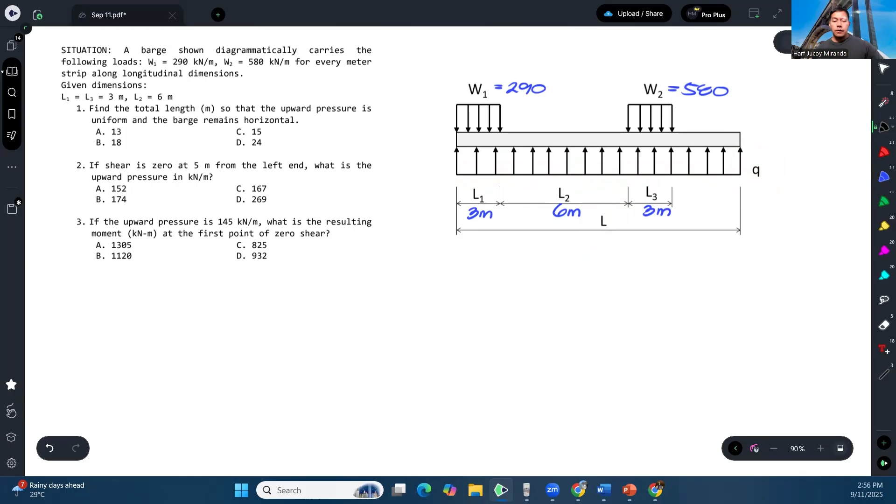Gagamitin ko to as my reference, yung left side. So we have summation of moment about the left side is equal to 0, assuming counterclockwise positive. So we have yung 290, kailangan muna natin yan.

Ikuna ng equivalent load, bali yung area nito, which is 290 times 3. Tapos yung moment arm nito, yan yun, W1 times 3. Ang moment arm niya, ito half. Half ng 3, so that's 3/2.

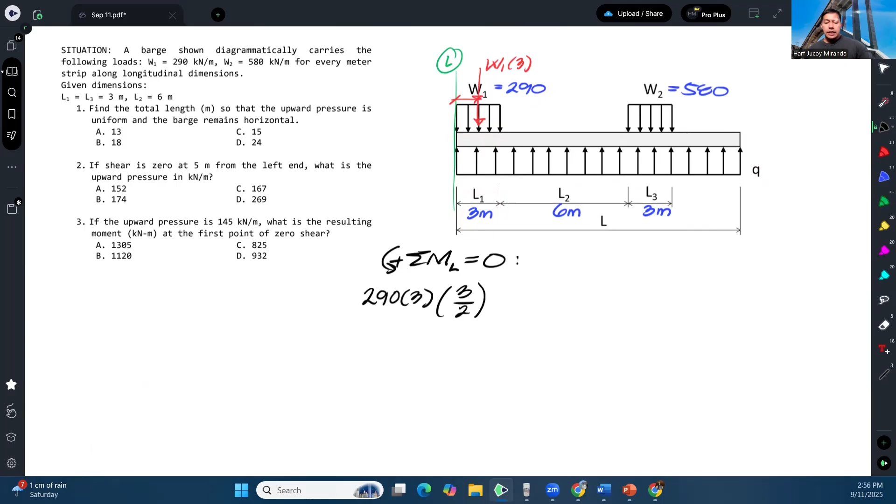Okay, and then that will rotate sa left side ng pa-clockwise, so I'll set this as negative.

Next, yung 580 naman. So 580, ganun ulit, area nito, 580 times 3. So ito yun.

Okay, and its moment arm from the left ay ito. Yan, and what is that length? So that is from left papunta dito, 3, papunta dito, 6, and then half ng 3. Okay, so that should be 3 plus 6 plus half ng 3. And the rotation is once again clockwise.

Lastly, yung vertical effect nito, no? So yung vertical effect niyan pag ganito. Okay, yung value niyan is Q times L. Again, area kasi nito yun eh, so yung height mo Q, yung length mo yung unknown natin na L. Okay, so lagay ko nandito, Q times L.

Okay, and what is the moment arm from the left? So ang moment arm naman natin, ito, which is, ano yan? Kasi rectangle siya eh, di ba? So dapat nasa gitna to, half, half ng L. So this should be times L/2, and its rotation will be counterclockwise. So I will set this as positive, and that is all equal to 0.

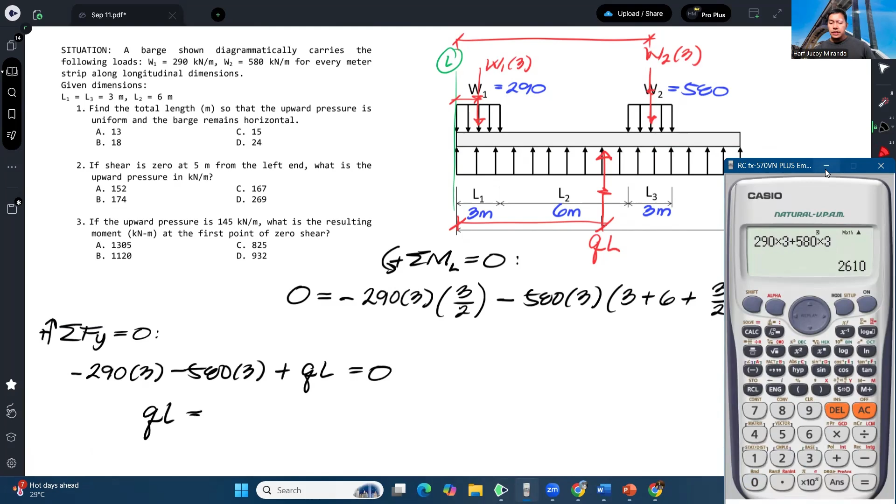Diba? And that is 290 times 3 plus 580 times 3, and that is 2610 kilonewtons. Okay, so ngayon, pwede na natin ulit palitan ito nito.

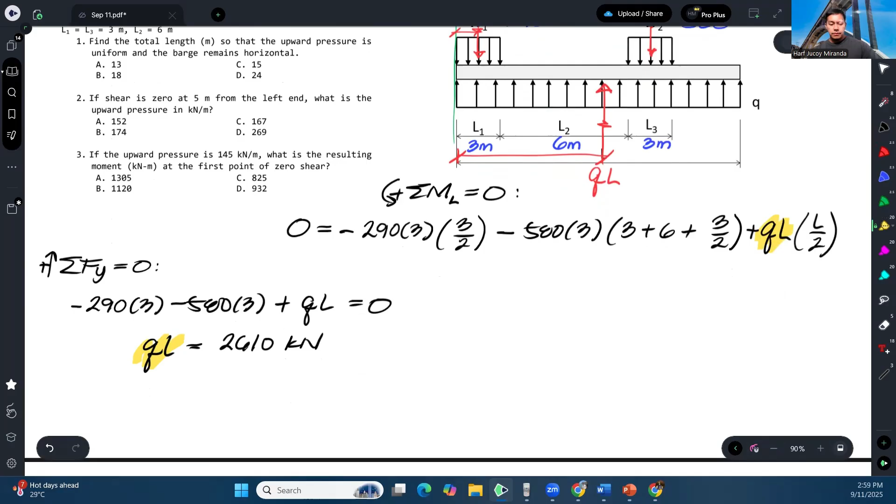Okay, and from there, we should be able to solve for L. So magiging ganito equation.

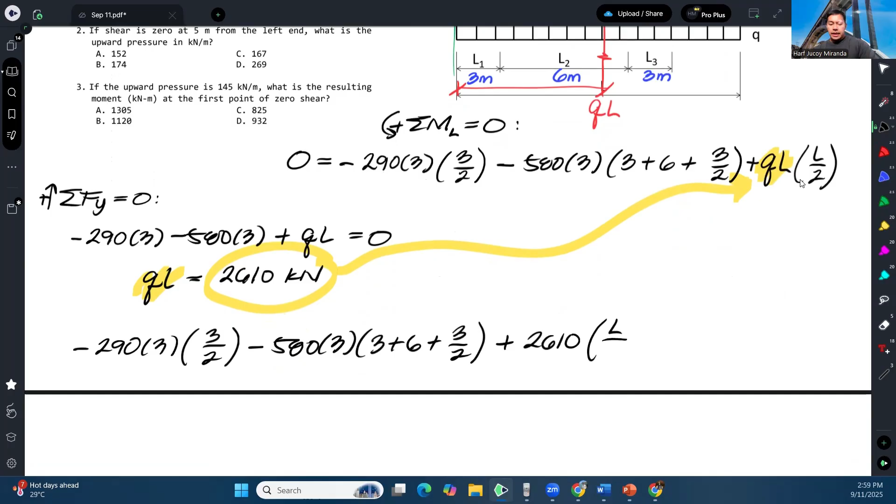Negative 290 times 3 times 3/2, minus 580 times 3 times 3 plus 6 plus 3 over 2, plus 2610 times L over 2 equals 0. And from here, we can solve for L.

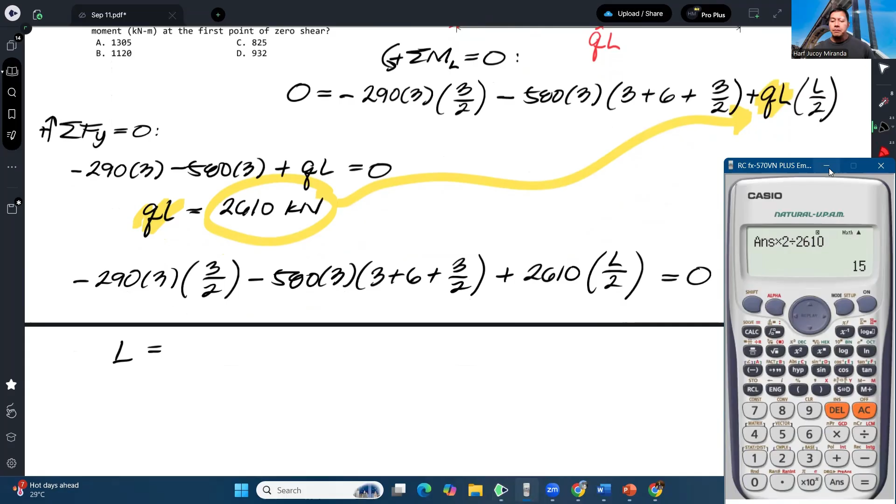Okay, so L, it will be 15 meters. So that will be the length of the barge para uniform yung reaction. So we have letter C for number 1.

Next, if shear is 0 at 5 meter from the left end, what is the upward pressure in kilonewton per meter? So itong number 2, hindi siya related dito sa number 1 kasi ang gusto niya yung shear daw dun sa 5 meter from the left end ay mag-0. So pinapahanap yung Q for this part.

Okay, so to solve for Q, I'll show you 2 ways. So una muna.

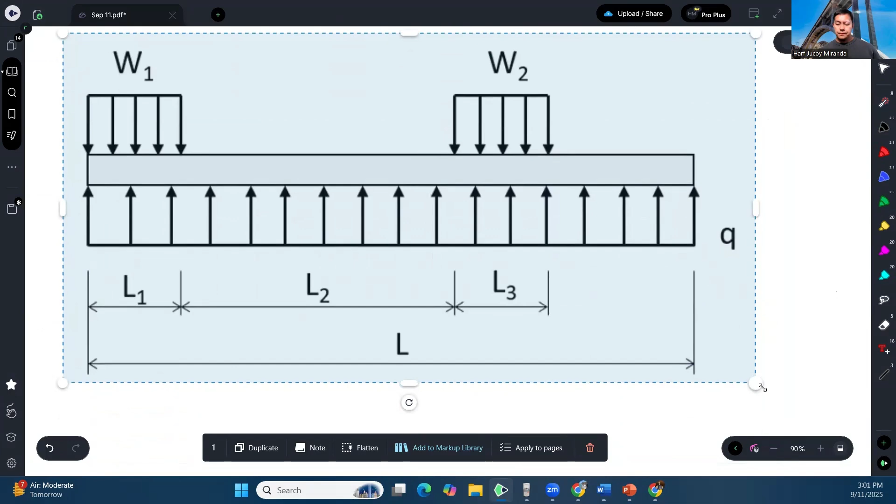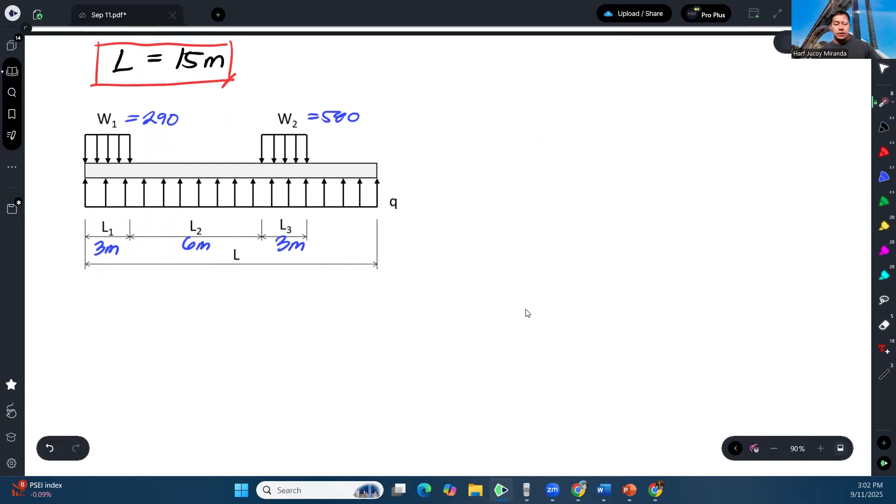Okay, so diba ito 290 to 580. Okay, so ito ay 3, 6, 3. So assuming na hindi ulit natin alam yung L. So ang tanong niya kasi, ano daw yung value ng Q para yung shear dito sa 5 meters. So yung 5 meters, no? So 3 kasi ito ay 0. So kapag dinrawin natin yung shear diagram dyan, ganito yung itsura.

So let's say ito yung 5 meters. And I don't really need to complete this, ganyan lang siya. So dapat daw yung shear dito 0. Okay, so dapat ganyan, mag-0 siya. So this is your 5 meter length.

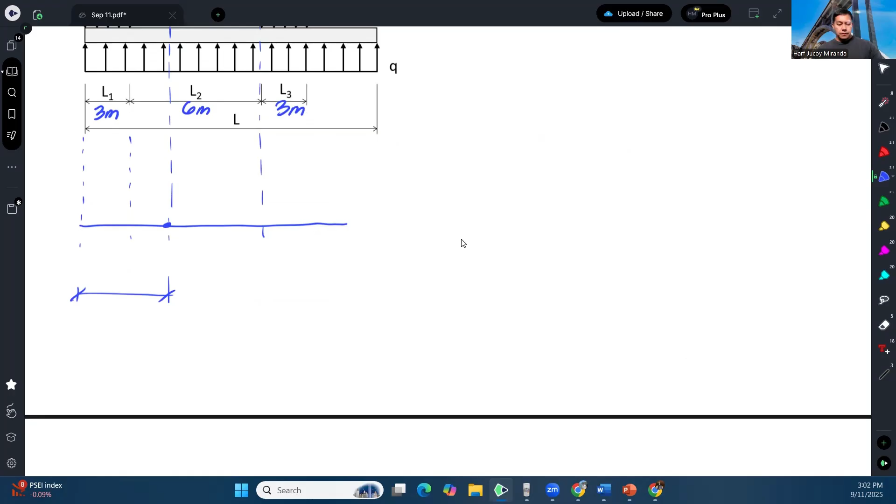Okay, so para mag-zero yon. Una, we have Q, unknown. But we know 290, di ba? So paano ba hanapin mo yung shear? Dito ang shear zero, so zero muna tayo magsi-start. Tapos paano hanapin yung shear pagdating dito? Kasi di ba ang shear ay area ng load diagram.

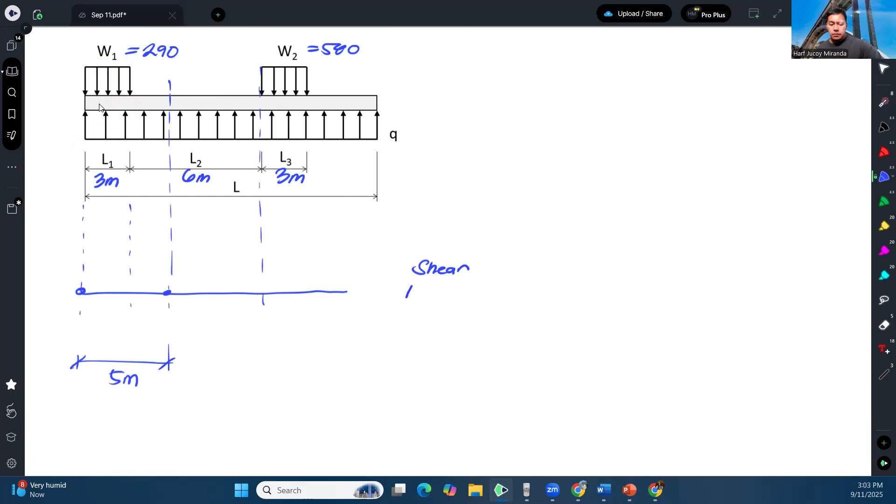So anong load diagram? Bali ito, pero magkabaliktad sila kasi as mentioned sa shear diagram, yung load, kapag upward positive, kapag downward negative. So lumalabas itong area na to, itong load na to would be negative, pababa. Ito namang load na to will be upward. Kaya parang mag-add sila, mag-plus minus sila. So ito negative, ito positive.

Pero dahil reaction lang to, it is safe to assume na mas maliit yung effect nito compared sa 290, kasi parang na-spread out lang yung uniform load eh. Ito mas concentrated sa region na to, kaya lumalabas mas malaki ito compared dito. At dahil doon, kapag ka nag-minus yung area na to sa area na to, mas mag-go-govern yung pababa, kaya negative yan, nandito yan banda.

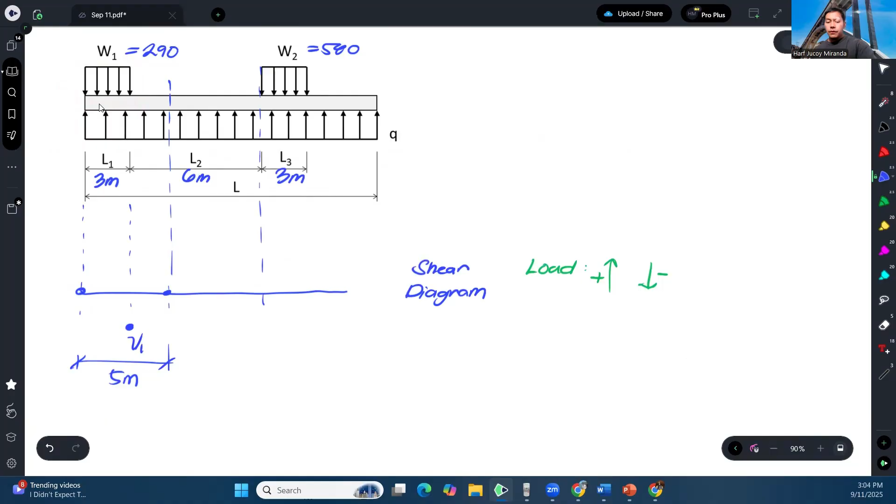So tawagin natin yon na shear 1, V1. What is the value of V1? Bali, yung area na pababa, so negative 290 times 3, and then plus yung area na pataas, plus Q times 3. So yung V1 ay equal, factor out ko lang yung 3, magiging negative 290 plus Q times 3. That is going to be our V1, and we are expecting na negative to.

And because this is just zero degrees, parehas zero degrees yan eh. Okay, so dahil zero degrees yan, dapat linear ito. Paganto.

Next, kailangan daw mag-zero dito. Yan, mag-zero yung shear. So kailangan daw mag-zero yung shear dyan. So, just to continue this, makukuha natin yung shear dun sa kabila, dito. And tawagin ko yun na V2.

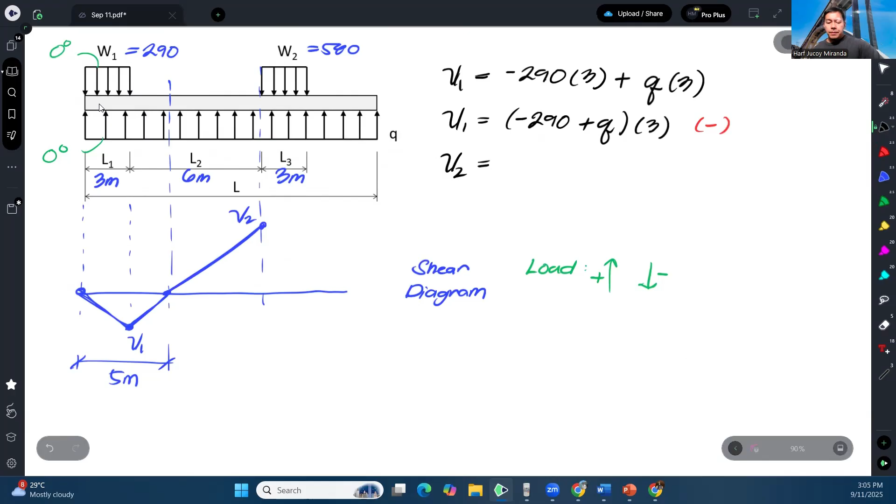So yung V2 naman na yun will be equal to negative V1, kasi yung V1 natin negative eh. Or rather, V1 na lang kasi naka-automatic naman to na negative. So V1 plus etong area na to. Kasi dito yung V1, di ba, mula dito hanggang dito. Okay, and that is just Q times 6. So V2 is equal to negative 290 plus Q times 3 plus Q times 6. And this is going to be positive.

Para ma-solve natin yung value ng Q, we can utilize, kahit hanggang dito lang tayo mag-drawing, huwag na natin ituloy, we can utilize these triangles. Itong triangle na to, dapat kasi similar sa triangle na to. At so far, alam natin na dahil 5 yan, tapos 3 to, so dapat ito, 2.

Okay, tapos ito, dapat ano to? Dahil supposedly, from here to here, 6, pero from here to here, ginawa mong 2. So yung from here to here, which is ito, is going to be 6 minus 2, or 4.

Okay, so by ratio and proportion, we have V1 over 2 meters is equal to V2 over 4 meters. Ito yun, V1 over ito, tapos V2 over ito.

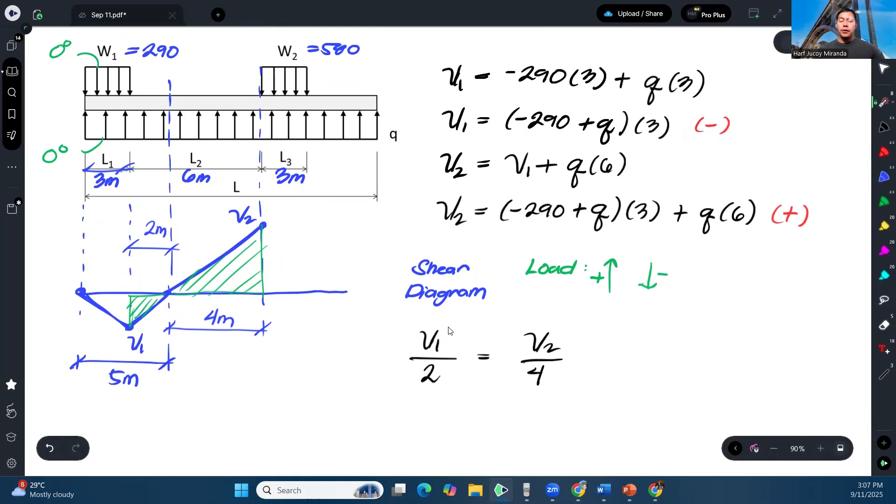Pero be careful yung V1 kasi natin dito, negative yan eh. Pero di ba pag nagre-ratio proportion tayo, nag-absolute value lang tayo, so ina-absolute value lang natin. So that's why dito, i-reverse ko yung sign, kasi alam ko na negative to eh. So i-reverse ko yung sign, that's why ini-negative ko siya.

Negative 290 plus Q. Okay, again, ang reason dito is kapag ka nag-solve kasi tayo ng ratio proportion, kailangan yung mga values dun sa shear diagram, hindi natin isasama yung negative. At again, ito kasi negative to, so para mag-positive yan, nag-multiply ako ng negative.

Over 2 equals V2, which is, ito medyo mahaba, negative 290 plus Q times 3 plus Q times 6. Ito, no need to multiply by negative kasi ito, expectedly is already positive. Okay, positive to. Lagyan ko lang ng note so that V1 becomes positive.

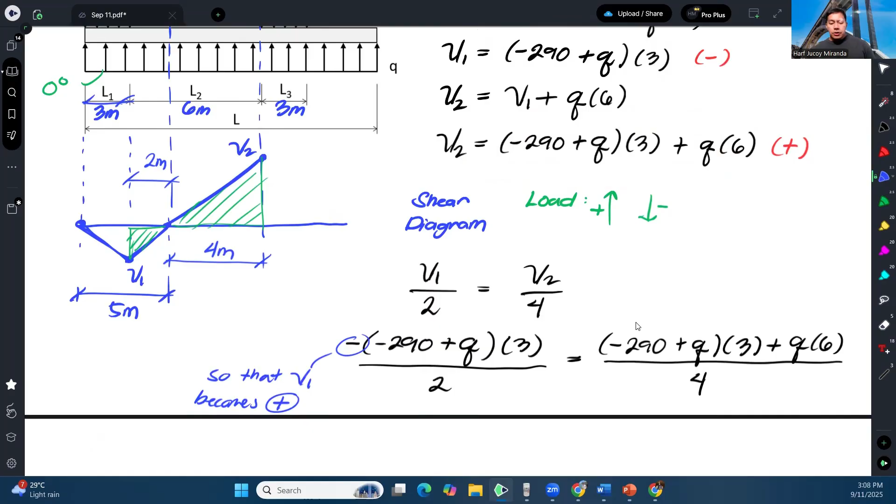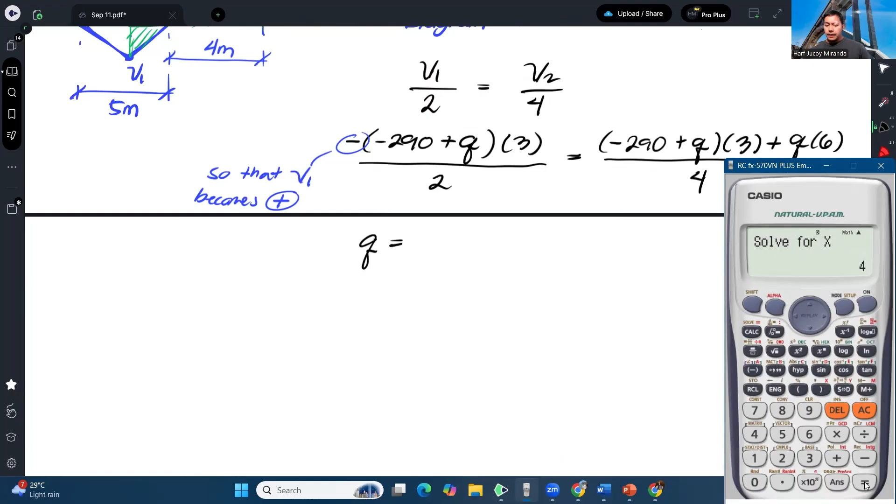And from here, we should be able to solve for Q. So we have negative of negative 290 plus Q times 3, over 2, equals negative 290 plus Q times 3 plus Q times 6, over 4. Okay, and that gives us Q equals 174, and that would be our answer.

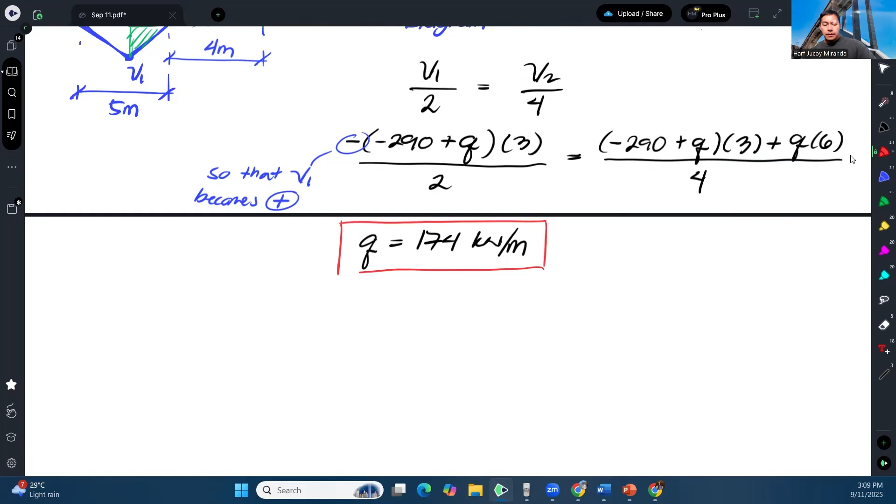Now, alternatively, kung ayaw mo ng ganyang solution na nagre-rely sa shear diagram kasi nahihirapan ka sa geometry part, pwede ka naman mag-method of section. Ibig sabihin, ika-cut ko to, i-isolate ko itong left. Tingnan natin yung mangyayari kapag ginawa ko yon.

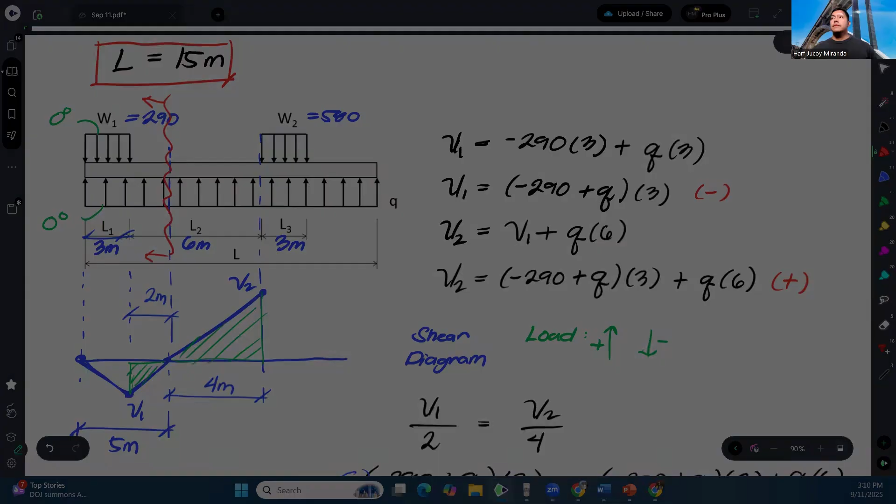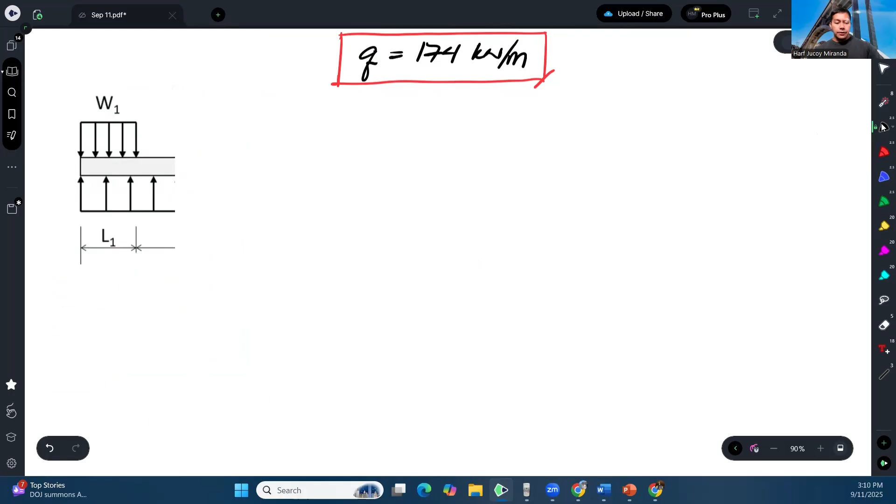Okay, tingnan natin ang alternative solution. Sabi ko sa inyo, I can show you two solutions. Alternatively, kung ayaw mo ng shear diagram, pwede ka mag-method of section. Kinat natin siya sa layong 5 meters, kasi sa 5 meters meron siyang given na value.

Sabi niya, yung shear daw dyan ay 0. So ibig sabihin, yung shear dito ay 0. Tapos may moment dyan. Okay? Tapos ito, 290. Tapos ito, Q. Okay? And then, alam natin na ito, 3 meters.

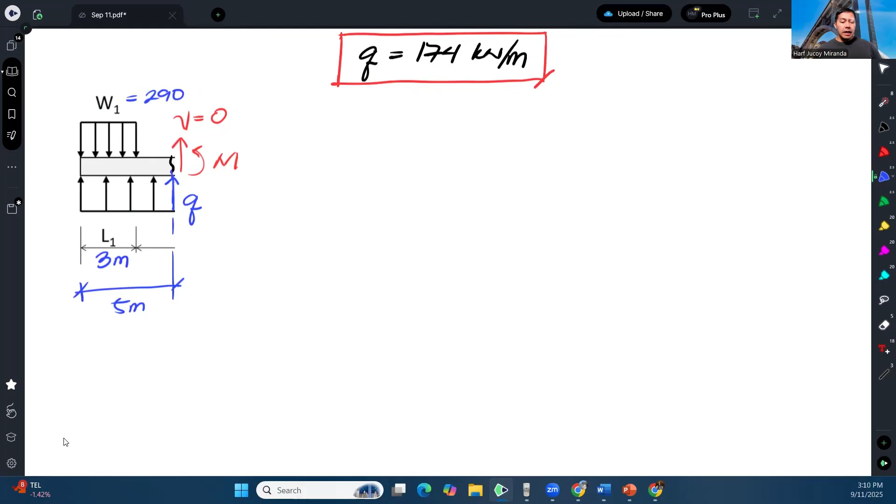Para ma-solve natin kung ano yung Q, ang mas mabilis na solution dito ay method of section. Ang gagawin na lang natin ngayon, magsasummation tayo ng forces, kasi alam naman natin ang location. So kung nag-summation tayo ng forces, dapat 0. So we have 290 times 3 na pababa.

Tapos yung Q plus upward, Q times 5 na pataas. At sa tingin ko wala nang iba, so that's it, all equal to 0. Yun na yun, kasi ang lumalabas nga, yung shear dito ay 0. Hindi naman ito pwedeng isama sa summation ng forces kasi moment yan. Okay, yan na yun. And then from there, you can solve for Q.

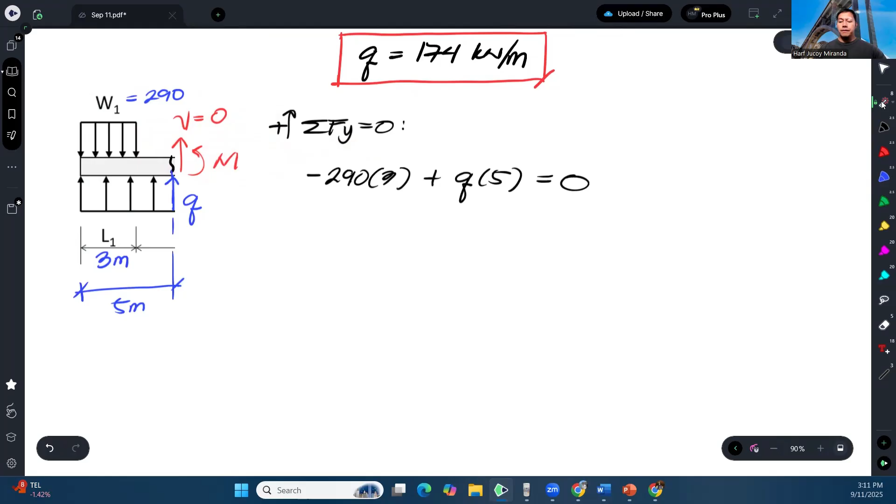And we should end up with the same answer, 174. And of course, this is easier, di ba? Kaya nga dapat versatile tayo.

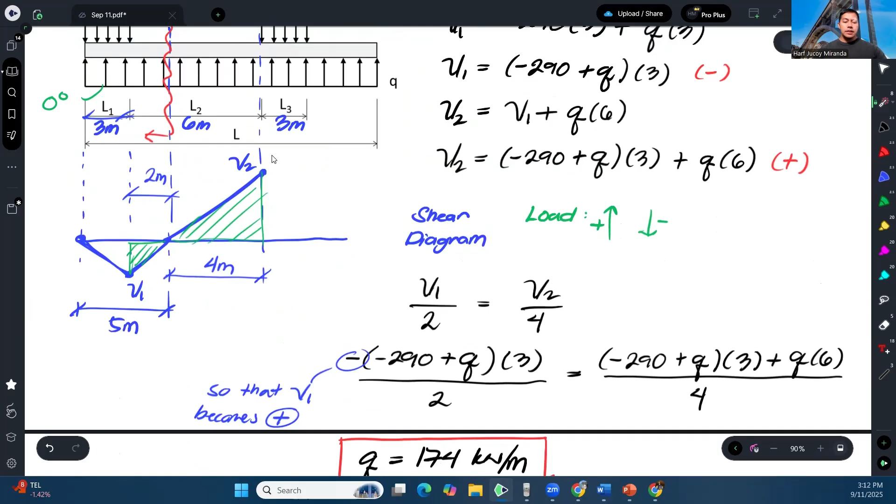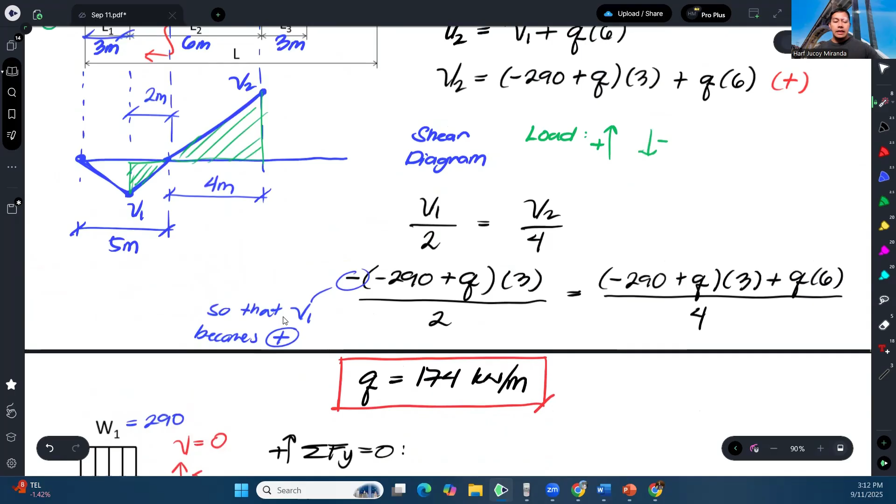Minsan kasi dumadali kapag sa diagram ka nakatingin. Minsan naman, kapag sa method of section, mas madali. Kailangan alam natin pareho, kasi minsan hindi naman lagi ito yung mas madali, minsan ito naman yung mas madali. It depends on the situation. Same lang yung sagot natin dyan. So that's how we answer number 2. Our answer here is 174.

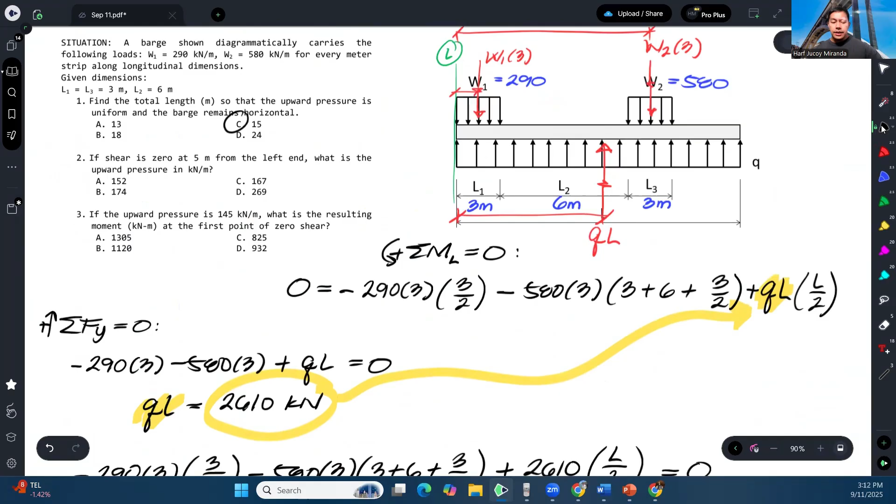Next, number 3. If the upward pressure is 145 kilonewton per meter, what is the resulting moment at the first point of zero shear? Ano naman daw yung moment doon sa first point of zero shear? Kung meron, ito naman may value na yung Q. Okay, so number 3 tayo.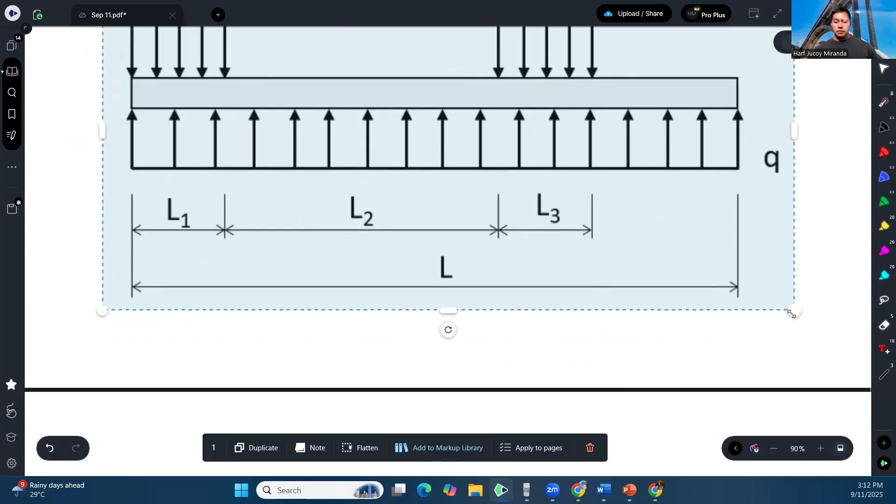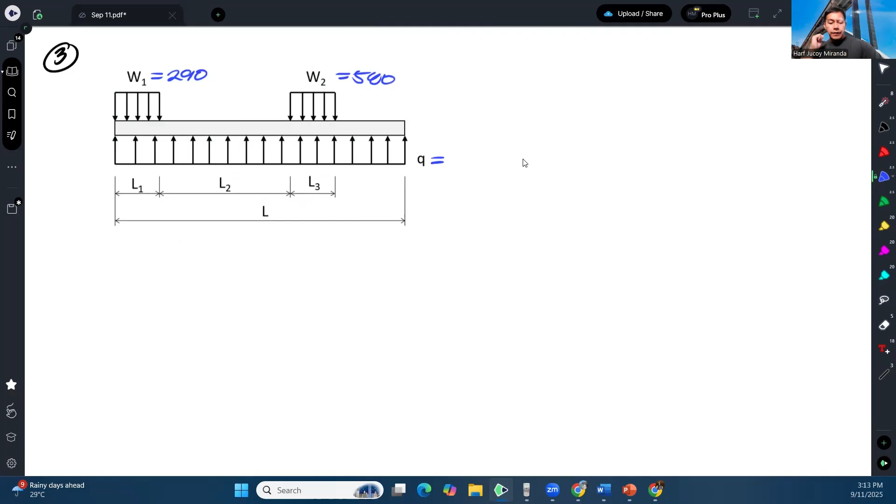So this is given 290, 580, tas given na ngayon, 145. Ang tanong sa atin, also given: 3 meters, 6 meters, 3 meters. At muli, ang tanong sa atin, ano daw dapat yung moment dun sa location na first point of zero shear. So ang una kong gagawin, pwede tayo mag-shear and moment diagram. Shear diagram muna.

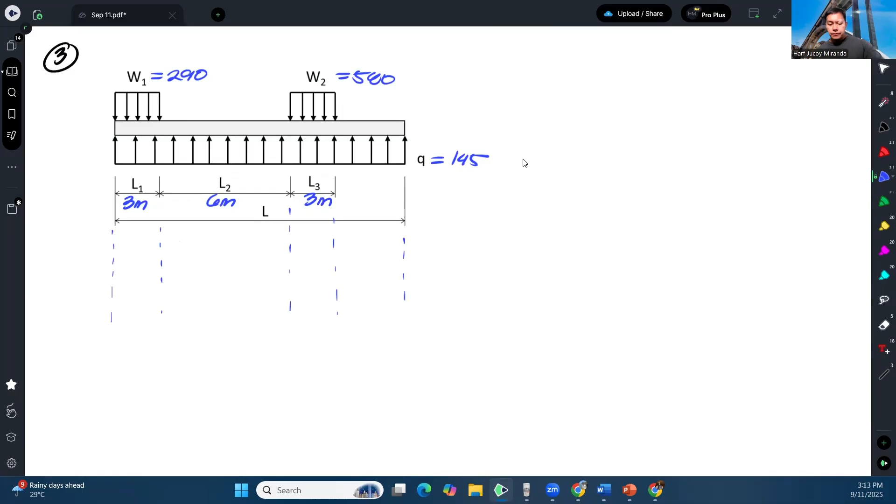Okay, so shear diagram, starting off with 0. Tapos magma-minus itong area na to, negative tong area na to, tapos positive tong area na to, para makuha natin yung shear dito. So we have negative 290 times 3 plus 145 times 3, and that gives us negative 435.

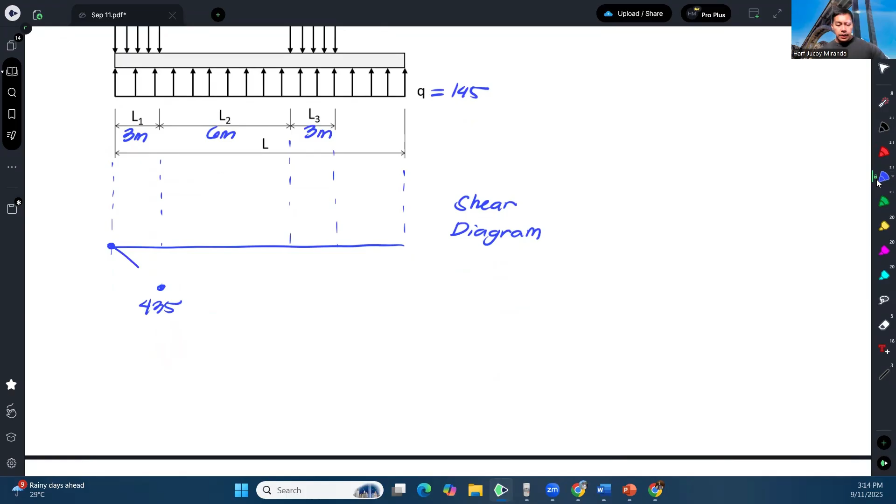So next sa baba, okay ito yung diagram natin. At pagkatapos, mag-a-add tayo nitong area na to, from here to here, yan yung area na yan, which is upward yung load, kaya positive. So plus 145 times 6, so that gives us 435 na positive. So connecting the two, ito naman yun.

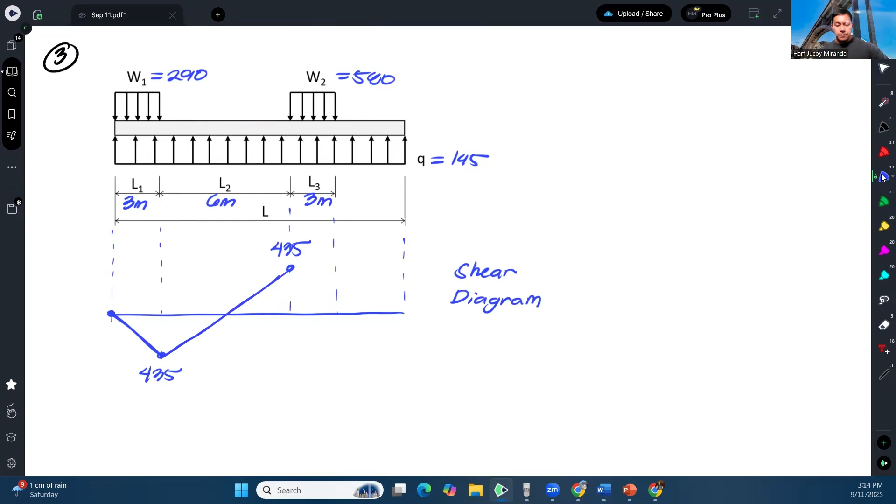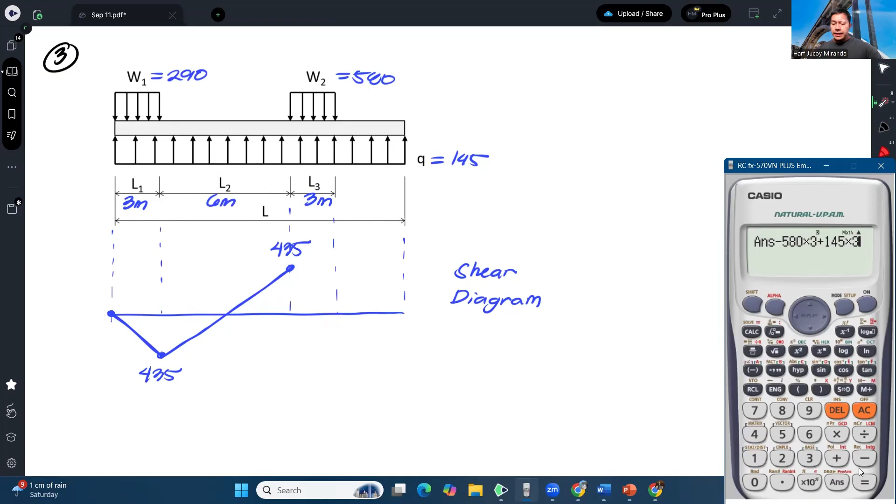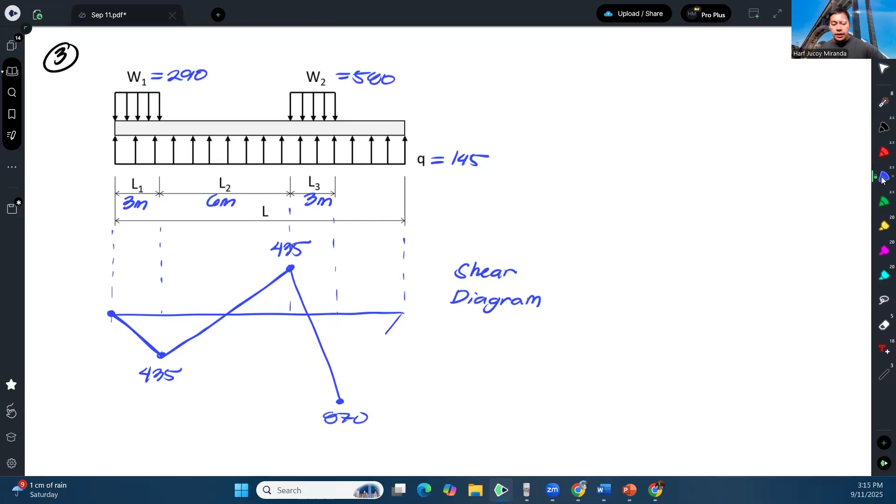Okay, kailangan na ulit natin makuha yung load dito, yung shear dito. So i-minus natin tong area na to, tapos ipa-plus natin tong area na to. So minus 580 times 3 plus 145 times 3, so that is negative 870. At saka i-connect ko na lang to kasi dapat mag-zero yan, di ba?

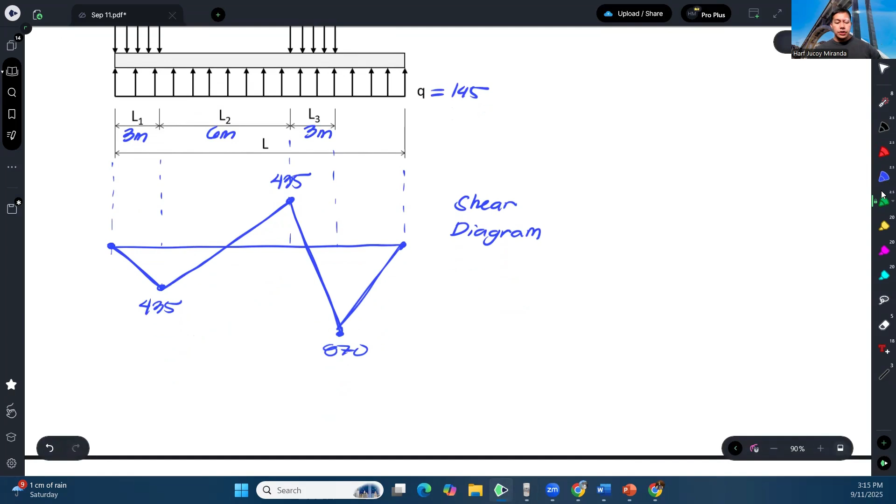Okay, so ayan. Anyway, ang tinutukoy sa atin na point of zero shear, actually meron ditong apat na point of zero shear. Yung unang-una, no, which is yung nasa dulo, pero hindi yung tinutukoy sa problem. Ito yung sinasabi niyang first, no? Meron pa tayo ditong point of zero shear, tapos ito pa, isa. Pero yung tinutukoy niyang first ay ito, kasi wala namang sense kung tatanungin niya kung anong moment dyan.

Pero gusto ko lang i-define, pag sinabi natin na point of zero shear, ito yung point kung saan nag-cross yung shear diagram dun sa zero axis. Bakit importante yon? Kasi matatagpuan natin yung mga peak moments sa point of zero shear. Kaya magkaka-idea ka kagad kung saan mo hahanapin yung maximum moment. So this is our shear diagram.

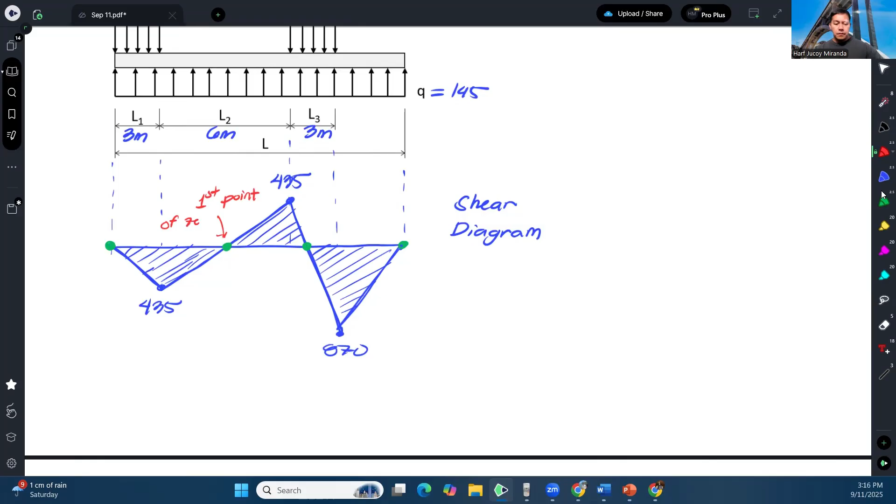Yan, yung shear diagram natin. Bali sa atin, tinatanong tayo, ano daw yung moment dito? Para makuha yun, pwede tayo uli, i-continue yung diagram natin, kahit hanggang dyan lang, kahit hindi natin kompletuhin.

Ayan, so dito 0, tapos ito, bali area nito, no? Area na yan. So yung area niyan ay 1/2 times 435 times 3, 1/2 base times height. Actually negative yan, kasi yung area mo nasa ilalim, so negative to, negative 652.5.

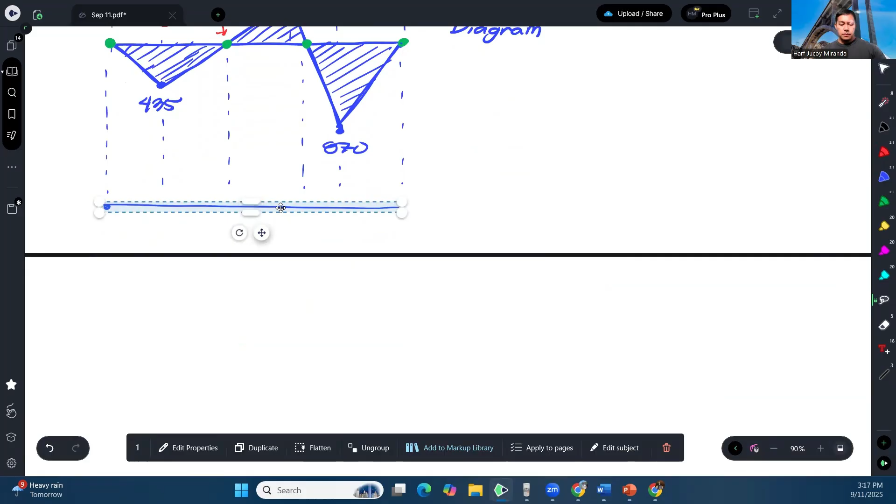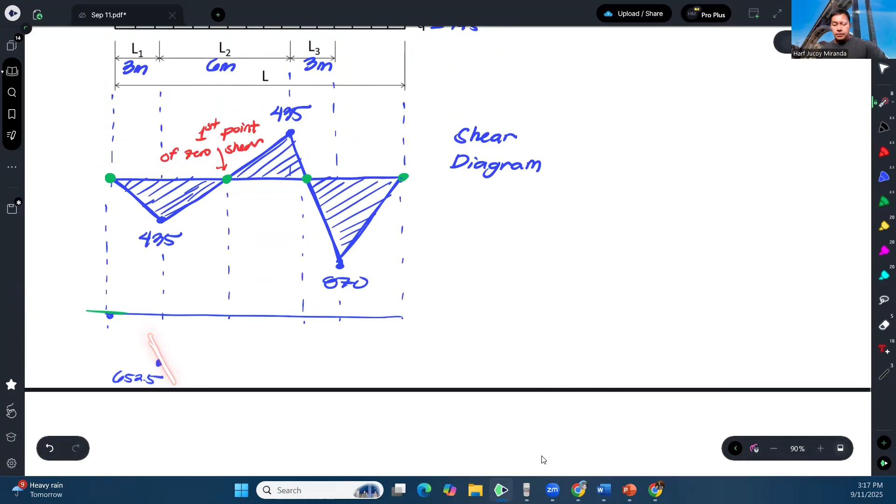Negative. Based on the value of the shear, should the slope here be 0? So dapat yung slope dito 0. Tapos, ang value ng shear dito, negative. So ang itsura ng negative na slope, pag ganun, pag ganito. So ibig sabihin, ang diagram natin, dapat ang itsura ganito. Second degree.

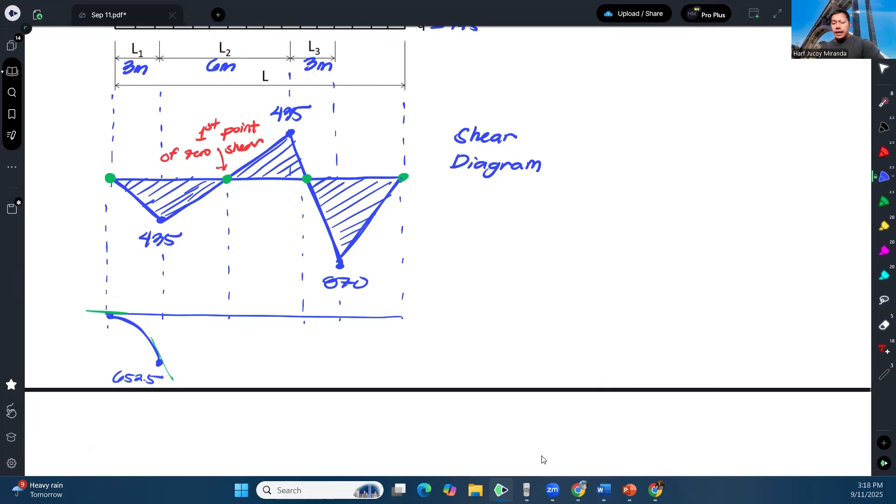Next, we also need to subtract this area again. Itong area na to, which is ano yan? So again, kailangan nating hanapin tong distance na to. Okay, but because of symmetry, makapansin naman natin symmetrical. Ayan na. Yung triangle na to, symmetrical sa triangle na to. Okay, so 435 parehas yung value. So ibig sabihin, itong x na to will be 3.

Okay, so itong kabila, also 3 meters. So we have minus ulit, kasi itong area na to negative. So minus 1/2, 435 times 3. So that gives us negative 1,305.

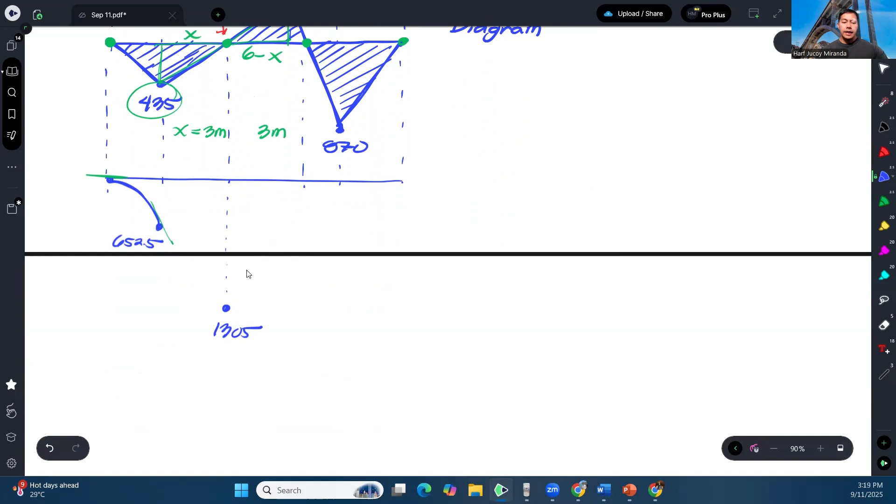Okay, negative. Ngayon, paano i-connect yung dalawa? So once again, sa point na to, ang slope natin, negative. So ganito dapat. Point na to. Sa point na to, ang slope natin ay 0. So ganito dapat. So paano mo i-connect yung ganitong slope at yung ganitong slope? So there's only one way. Pag ganito, pag ganyan. Kaya hindi pwedeng pag ganito, kasi dapat it should correspond dun sa inclination ng mga slope. Alright? So ganito siya.

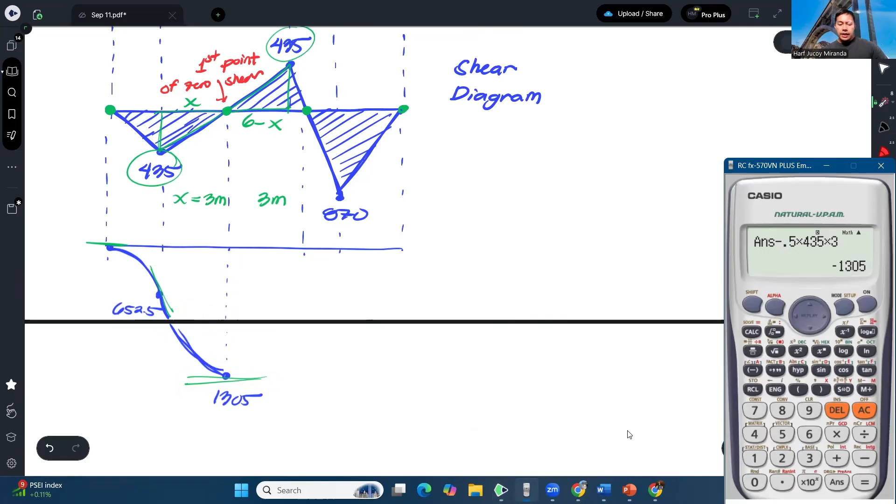Ayan. And actually, ito na yung sagot natin. Pero gusto ko lang kumpletuhin yung diagram, para lang may idea rin tayo kung paano siya isolve. So next, kailangan nating i-add itong area na to. So pag in-add natin yung area na yan, so plus 0.5 ng 435 times 3. So babalik tayo sa negative 652.5.

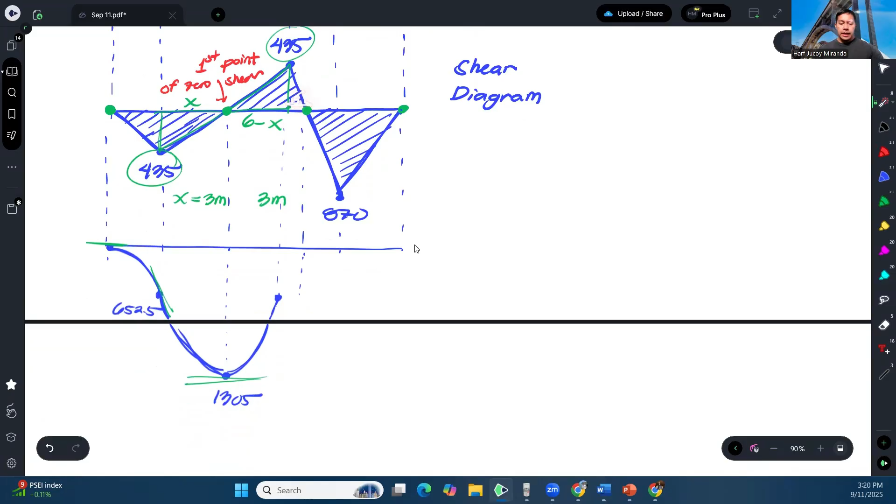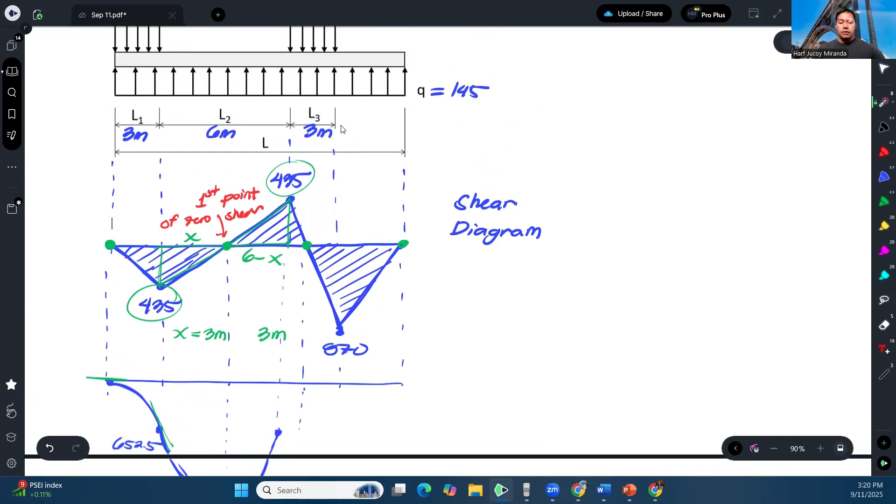Okay, and then we will need to add another area. Itong area na to. Ayan, no? O nga pala, hindi natin ito makakompleto kasi hindi pa natin alam yung length na to eh. So, I will stop here. Kasi hindi natin alam nga pala itong length na to. Okay, but anyway, ito na ngayon yun. Yan yung moment dun sa point, the first point of zero shear. Ito yung sagot natin.

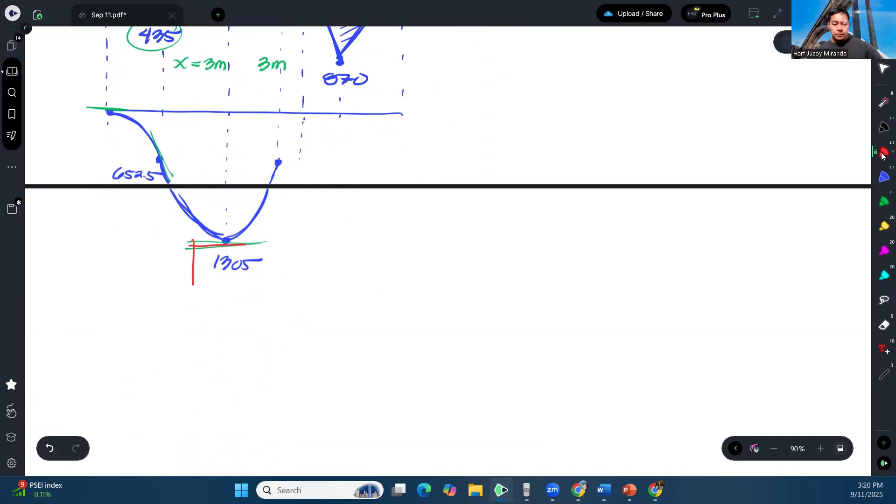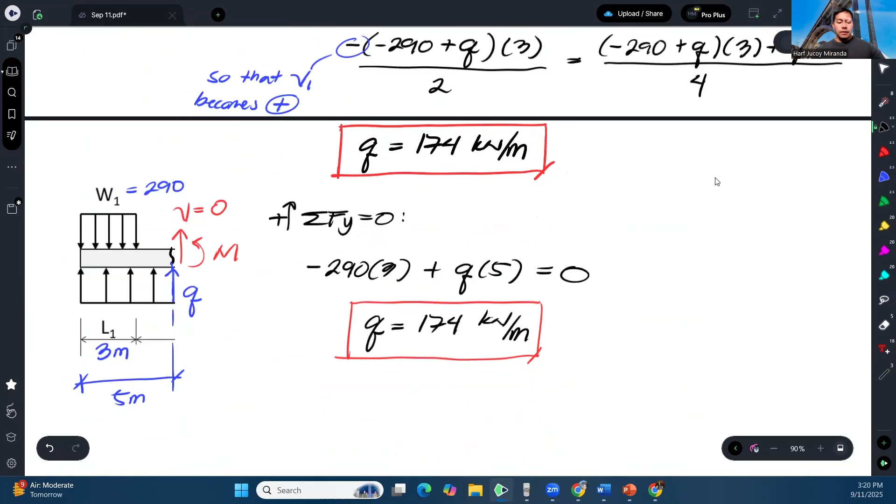Okay, so 1305. Once again, we can solve that alternatively using method of section. So sabi kasi sa number 3, hanapin mo daw yung moment dun sa point of the first point of zero shear. So mag-a-assume tayo na dito yun mangyayari. Kunwari, hindi pa natin to alam ha. Hindi natin alam. So mag-assume na tayo, nandito yun, wherever that may be. So nandyan yun. So we can solve for that. Okay, so kapag kinuha natin siya dito, method of section.

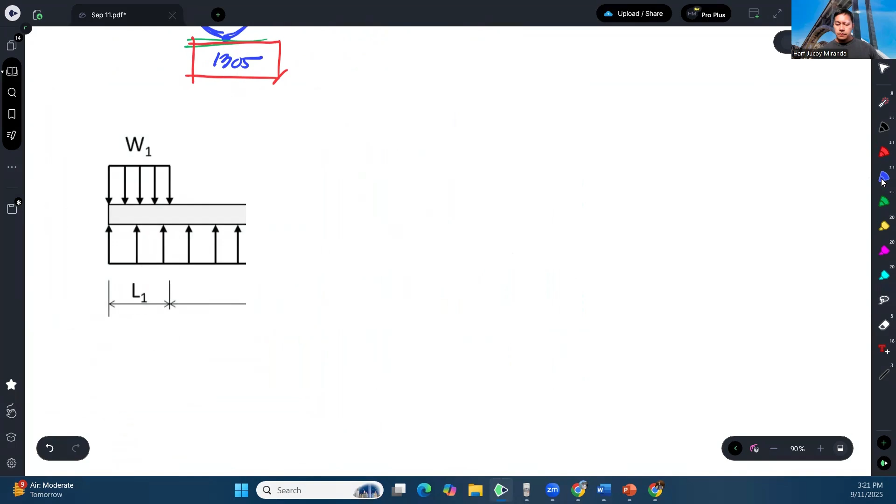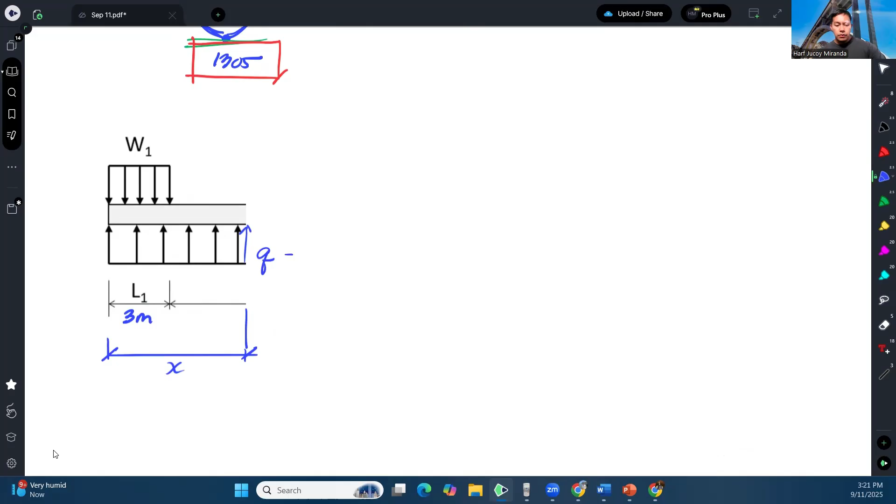So, eto 3 meters. Eto hindi natin alam kung saan tayo nag-cut. Unlike kanina na may sinabing 5 meters, di ba? Dito hindi natin alam, tawagin natin X. Okay, pero ito alam natin to. Q is 145, given yan. Ito naman 290. Okay, pero ito na nga yung section mo.

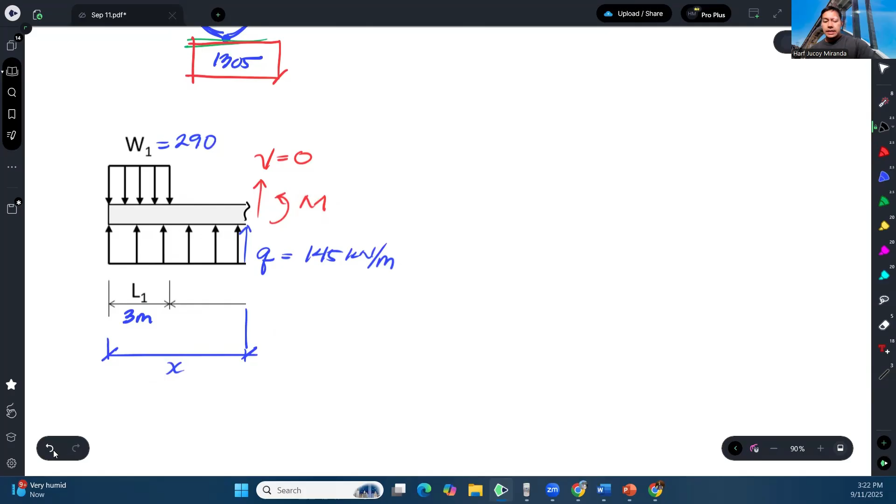So ngayon, meron dyang lilitaw na shear. Pero sabi sa problem, zero daw yun, di ba? Point of zero shear eh. Tapos yung moment, yun yung hinahanap natin. Okay, so what we can do here is, before we can apply summation of moment, kasi hindi pa nga natin to alam, we can apply first summation of forces. So if you apply summation of forces y equal to 0, assuming upward positive, we will have downward yung 290 times 3, tapos upward yung q times x. And dahil 0 nga ulit ito, so hindi na siya kasali. So therefore, we can solve for x.

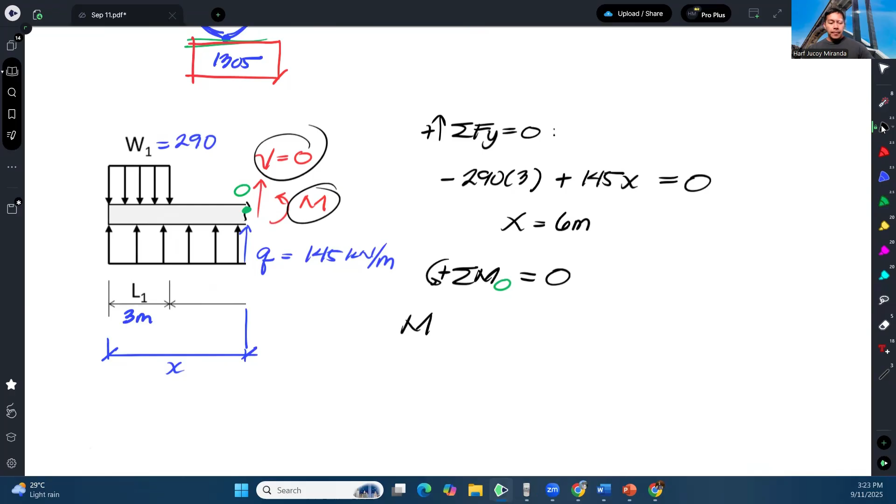And that is 6. So sa 6 meter pala yun mag-occur. Okay, and from here we can now apply summation of moment about the same point dito sa point na to. Tawagin ko na point O. About point O equals 0, assuming counterclockwise positive. So we have M, yung moment na to, tas yung moment nito, which is counterclockwise, so plus 290 times 3. Ang moment arm nun is ito, which is, di ba kung ito ay 6 from here, so lumalabas 3 meters to. So ibig sabihin ito ay 3 plus 1/2 ng 3.

Okay, kasi 3 to eh. From here to here, 3. From here to here, half ng 3. Okay, and then lastly, yung Q naman. Yan naman yung Q, so ang moment niya pag ganito, clockwise. So minus 145 times x, which is 6. Tapos ang moment arm niya, of course, half ng 6. Or basically 3. And that is all equal to 0.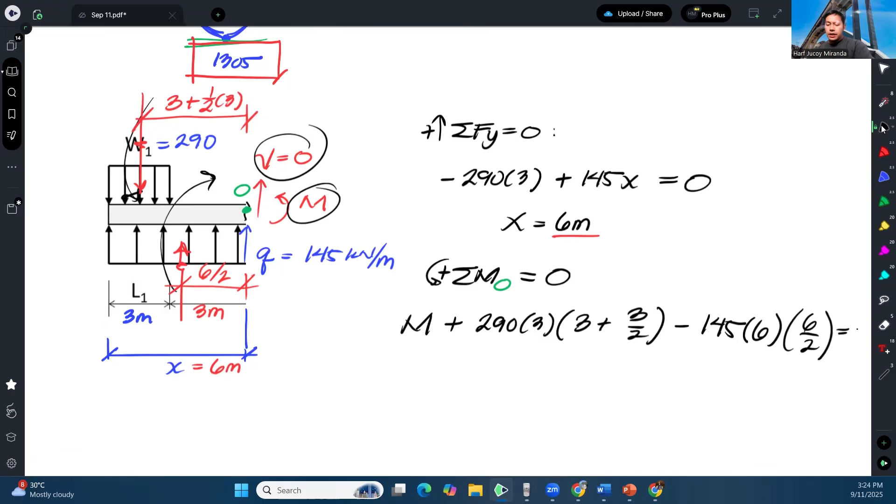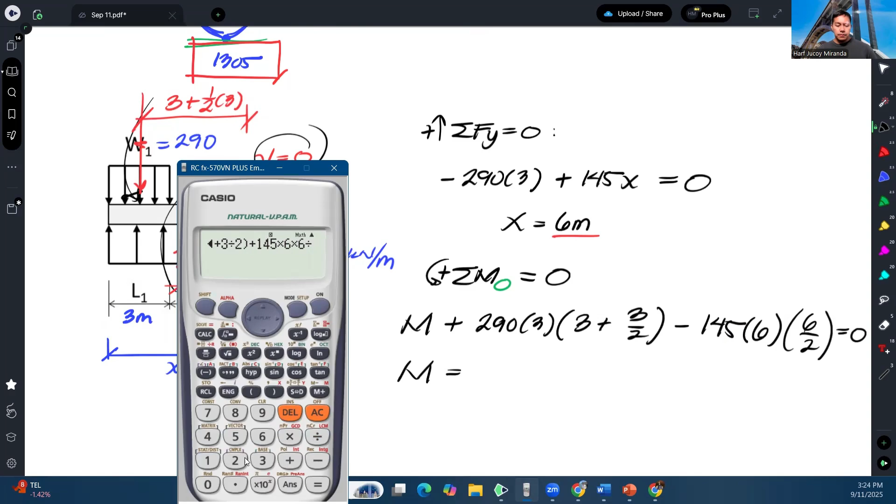And from there, we should be able to solve for the moment. So we have negative 290 times 3 times 3 plus 3 over 2 minus, plus 145 times 6 over 2. Okay, and that gives us negative 1305. So yung negative na to simply means that mali yung assumption ko, mali yung assumption ko ng direction. So in-assume ko na direction.

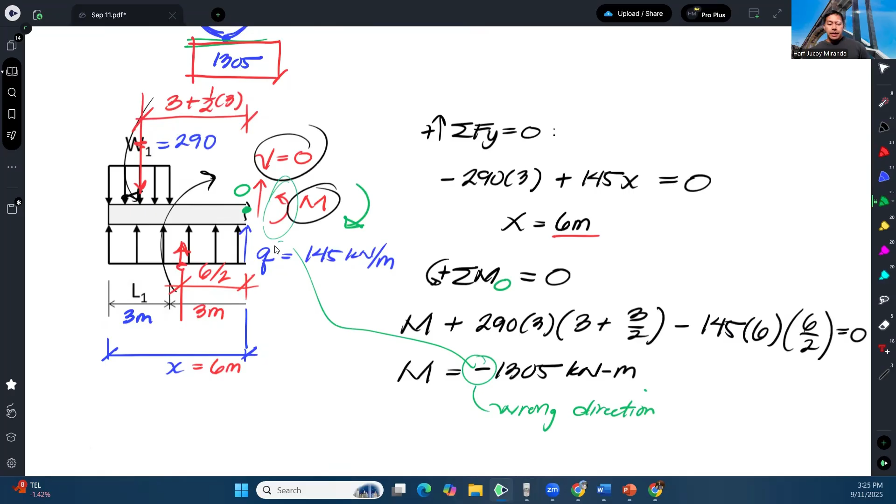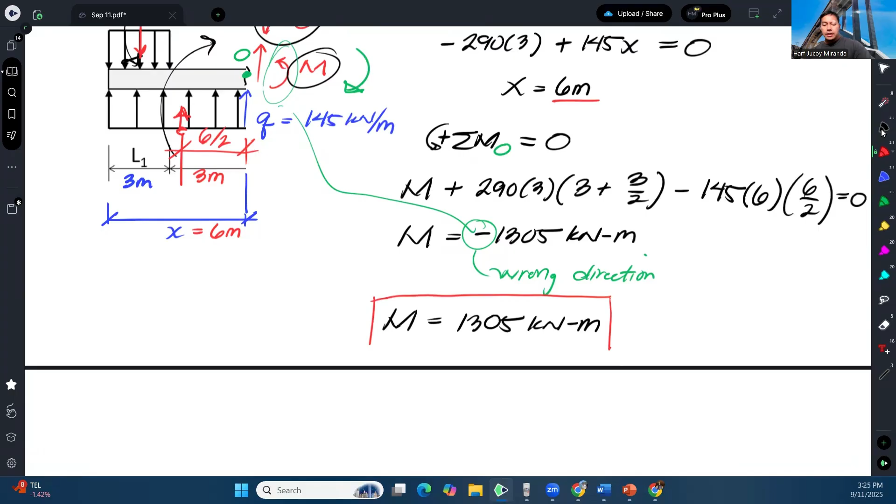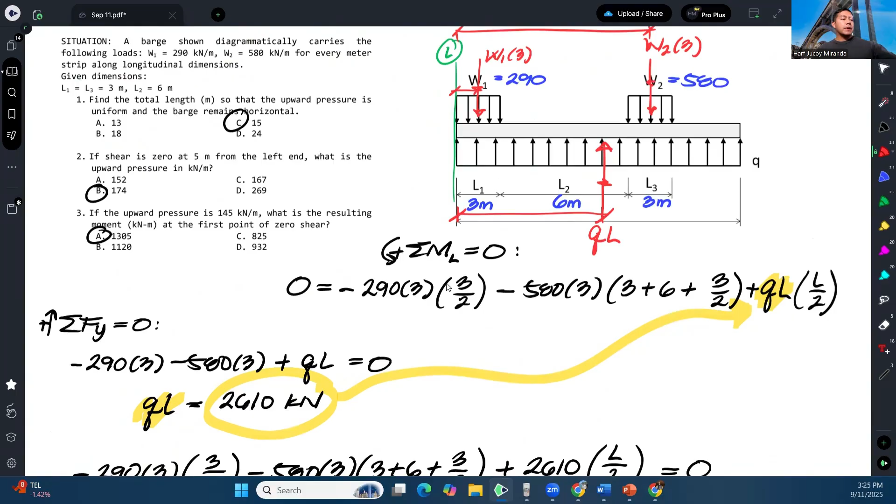Yun lang yun, no? So ibig sabihin, dapat pala pag ganito siya. Yun yung tama. Okay, but anyway, that is still the correct answer. That is still the moment there. So, therefore, our moment is 1,305 kilonewton meter. So that is another way of solving the moment asked in the problem. Okay, so ang sagot natin dito is still 1,305. And that's how we solve this problem.